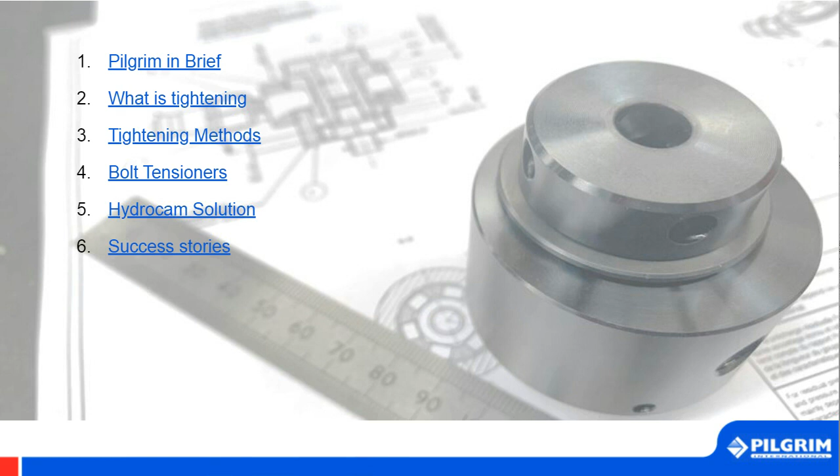First, we would like you to view a short video on who we are.

Pilgrim has been at the forefront of critical bolting technology for over 60 years in every industry where this is a requirement, putting us at the forefront in the world of trouble-free connections. And through our inventive ideas and solutions, we still remain the company of choice for bolting and tensioning systems, where we remove the uncertainty from critical joint fastening.

Over these years, we've come up with thousands of solutions for many bolting applications, and we've categorized most of our product ranges into 5 simple, easy to visualize categories. Today, we shall concentrate on our hydraulic tensioning systems range, branded HYDROCAM. I shall now hand you over to my colleague Ivan, who will take you through the next few slides.

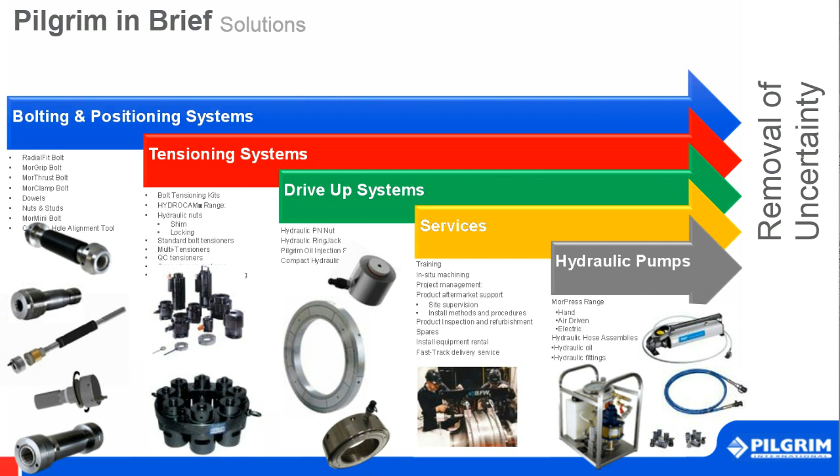Thank you so much, Martin, and hello everybody. So, exactly what is tightening?

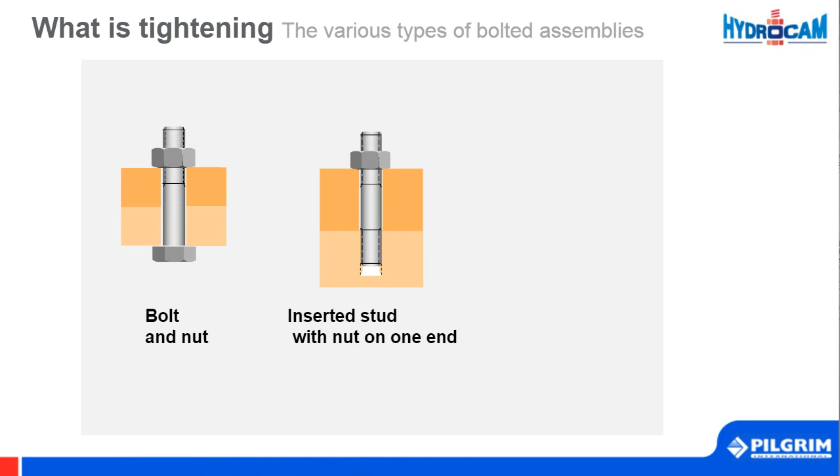Here are just 3 examples of the most common bolting arrangements used for bolted connections. There's a bolt and a nut, quite simple. A stud inserted into a blind threaded hole, plus a nut. And thirdly, a stud with nuts on both ends.

We should also be aware that the forces on the joint can act in many ways. These include traction compression, traction and bending, sealed containment systems, shear forces, dynamic loading, and spontaneous loosening. All of these must be taken into consideration at the design stage to ensure the most effective method of tightening the bolts.

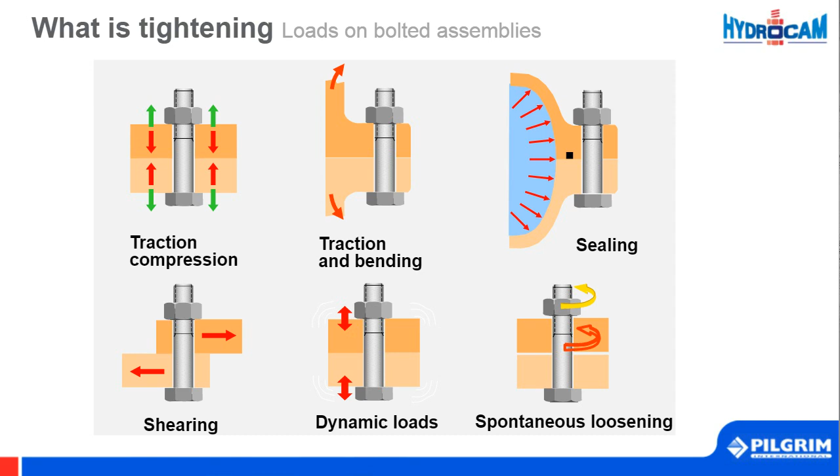Each bolt itself acts like a spring. Once stretched, it will always want to return to its original length. So, once we know what the load is required to secure the entire joint, we can introduce an applied load to each individual bolt. Tightening each nut under this load will result in an accurate total loading of the joint. But please note, the aim is to apply the same load to all of the bolts.

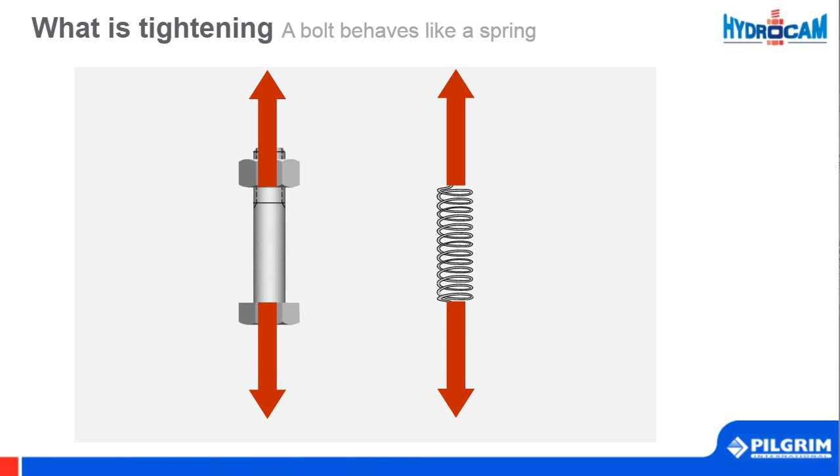Within the elastic range of the material, the more force you apply to the bolt, the more strain or elongation you obtain. As with a spring, when loading the bolt within its elastic properties, the bolt tries to come back to its original length, which translates to a clamping load.

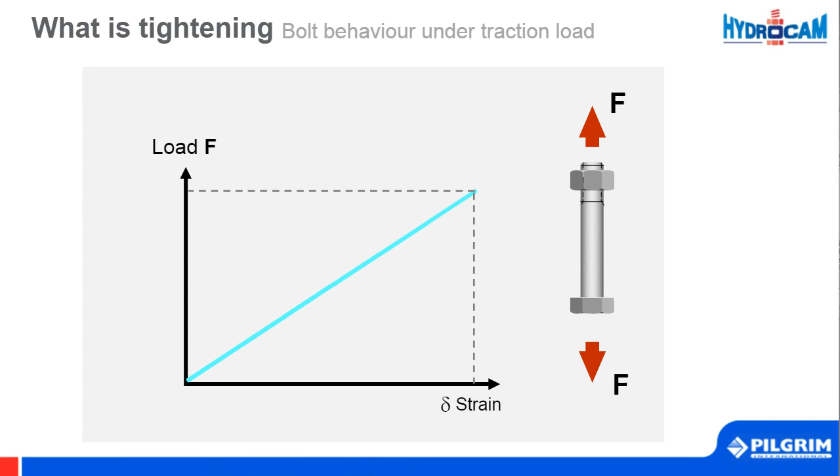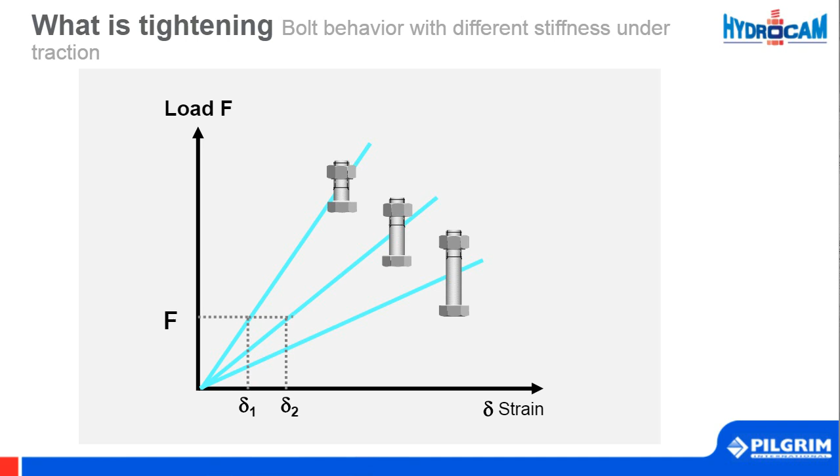The natural behavior of a typical bolt material is that the longer the bolt, the more spring it is capable of. And conversely, a more compact bolt will be stiffer.

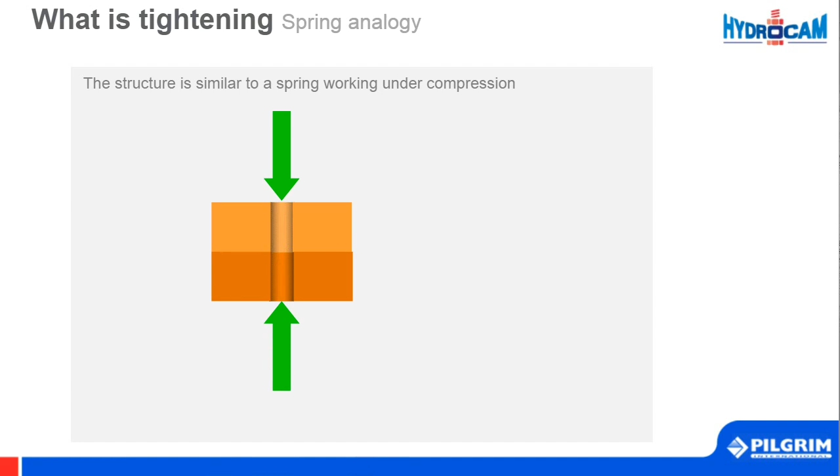As with the bolt, the structure itself also acts as a spring. When a compressive load is applied, the structure is going to compress. In addition, the thicker the material is, the more it compresses.

Bolts are typically made from steel. Like most metals, steel is elastic, so long as the strain or elongation does not exceed the elastic limit or yield point, beyond which permanent deformation occurs.

Within the elastic limit, a metallic component such as a bolt follows Hooke's law. That is to say that the strain or elongation is proportional to the stress or load. Any tightening method must ensure that the stress in the bolt never exceeds the yield point, above which deformation is irreversible.

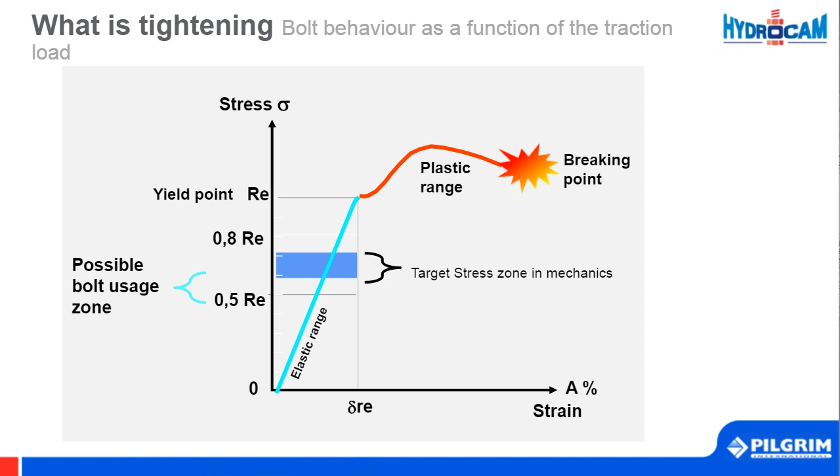Although bolt tightening can be effective from 50% of the yield point, the operator will typically target 70 to 80% of the yield point, because this is the optimal stress zone for tightening.

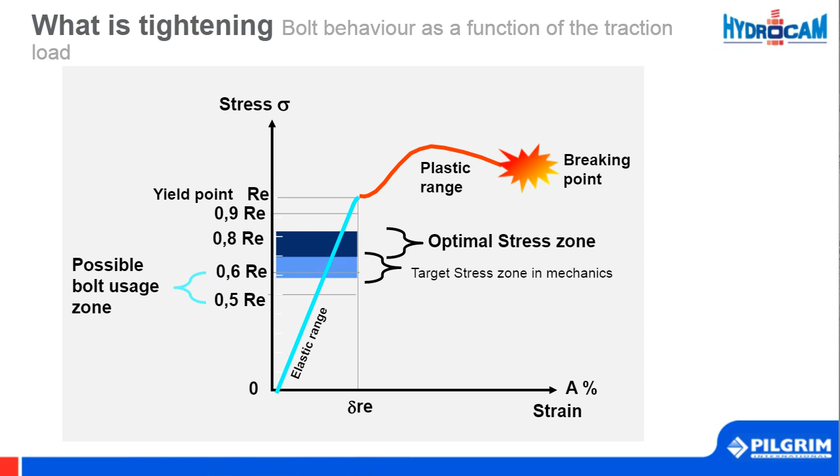An external load could also increase the traction force beyond the yield point of the material, at which stage deformation will be irreversible.

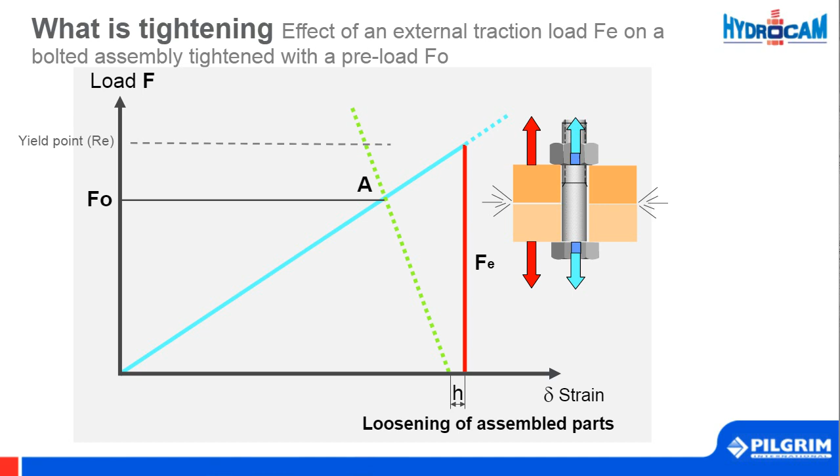We'll now talk a little bit about alternative ways to tighten a bolted connection. And here is a short video to show just one method.

Well, that's certainly one way to tighten a bolt. It is tight, isn't it? Well, maybe, maybe not. And in the world of critical bolted joints, we simply don't work in the world of maybes.

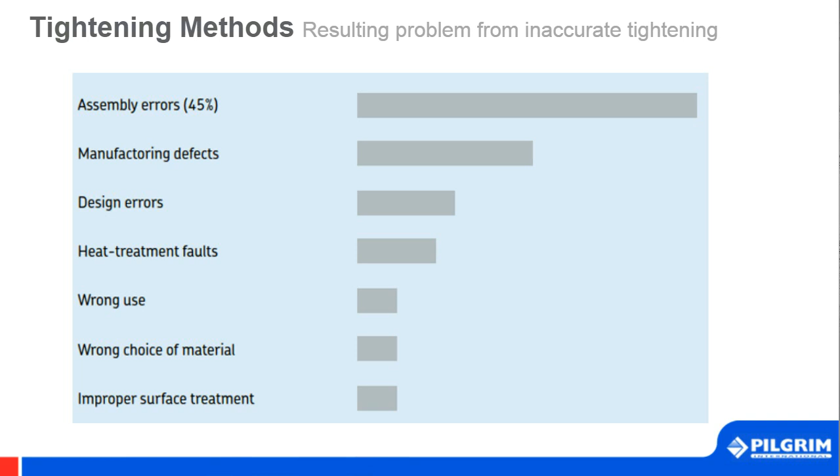Here are some alternative ways of bolt tightening: hand torque wrenches, hydraulic torque wrenches, heat induction, and tensioning.

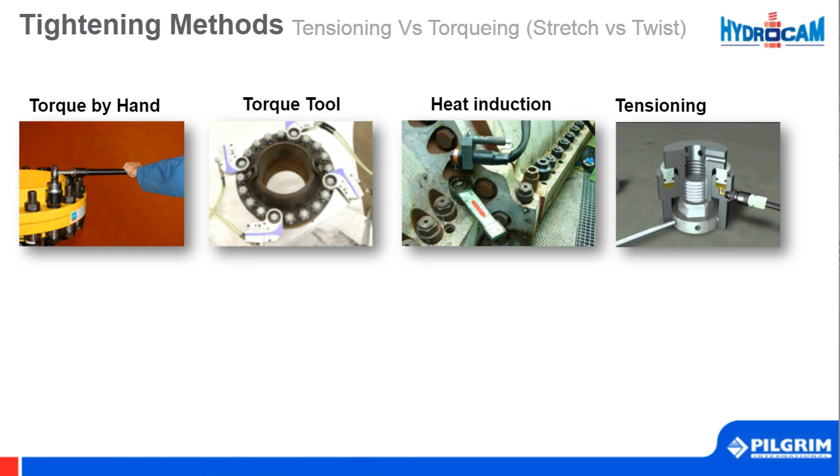Considering torque tightening, the most accurate method would be where there is absolutely no friction in the system to overcome, so that most of the torque is converted to tension load.

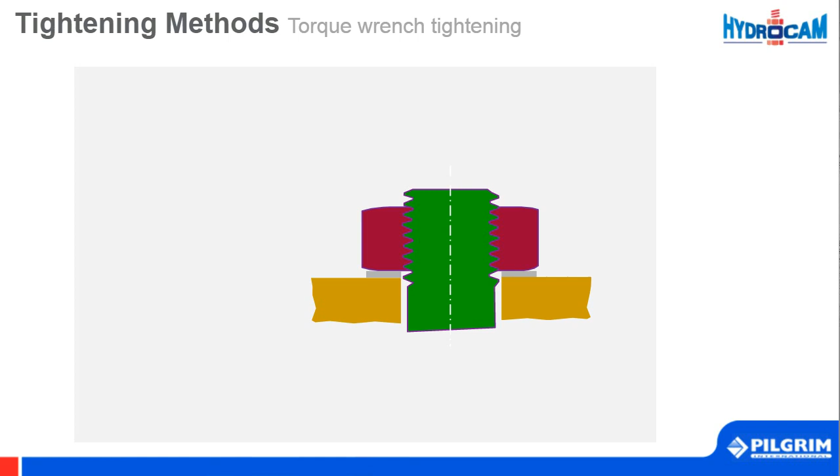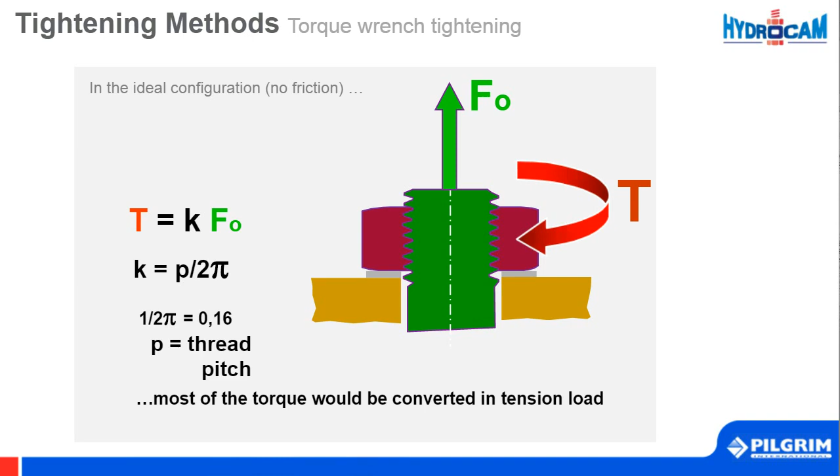But here's the reality. With torque tightening, there is always friction to overcome, both between the threads and the load-bearing surface and the face of the nut. In addition, a torque wrench will introduce torsion or twist in the bolt, which adds even further unknowns.

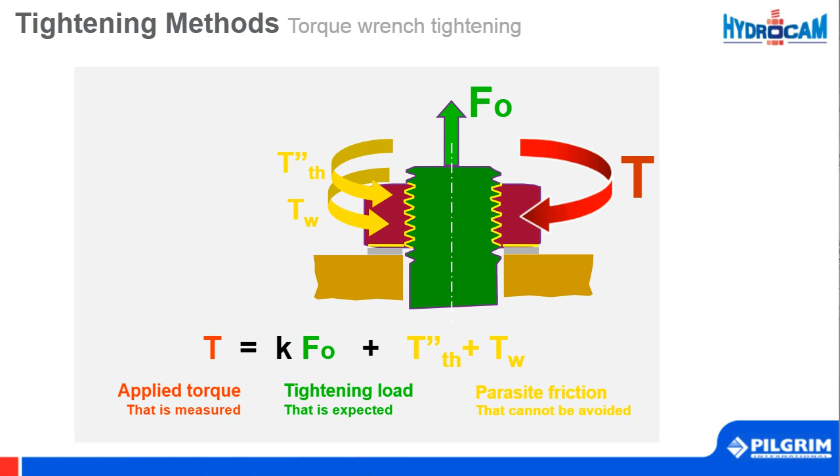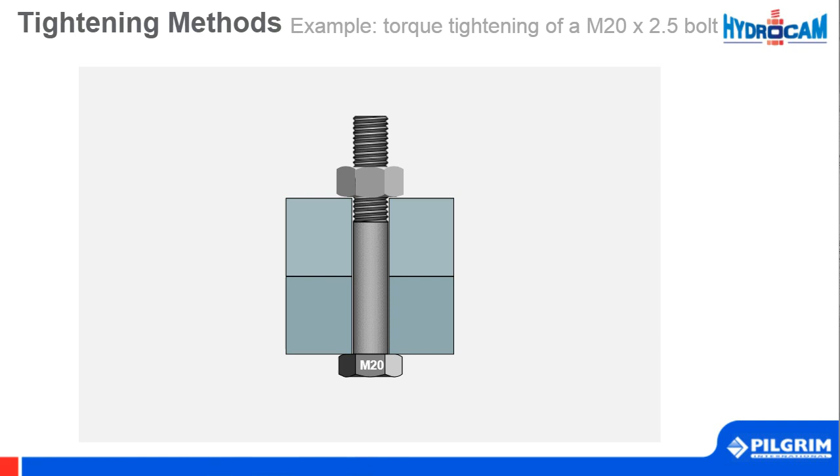Just so that we can understand the magnitude of these friction losses, here's an example where 520 Newton meters of torque is applied to a bolt. 180 Newton meters is used to overcome friction in those threads. A whole 273 is used overcoming friction between the nut face and the assembly. So only 67 Newton meters is eventually translated into an applied load in the bolt itself.

So friction soaks up generally between 80 and 90% of the applied energy, leaving just 10 to 20% of the wrench's power to apply a load to the bolt. That is a lot of wasted effort.

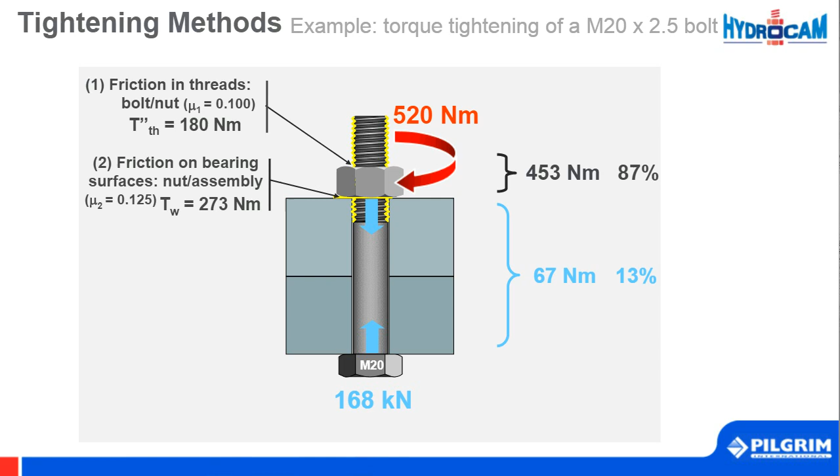That is just one of the reasons why there can be a high degree of uncertainty of the final bolt load when using a torque wrench, as your tightening method, along with the thread and bearing surface condition, the type of lubricant used, if used at all, along with the calibrated accuracy of the wrench, which is generally plus minus 4% of the maximum output value, these introduce unknowns.

Also, the effects of parasitic torsion cannot be dismissed, as the torsion within the bolt reduces tightness over time because it's trying to loosen the bolt during normal service. This problem can be further exacerbated if also subjected to vibrational forces.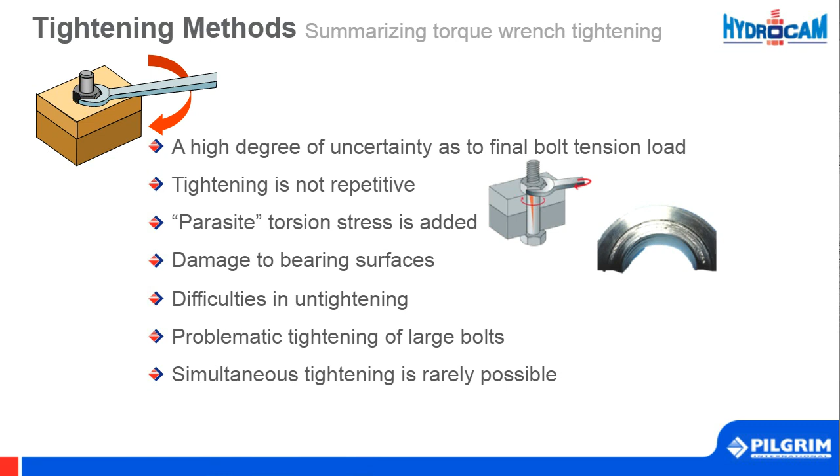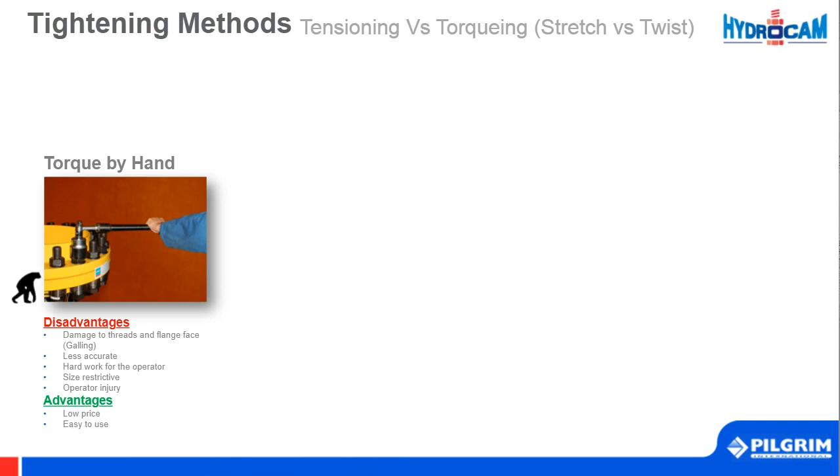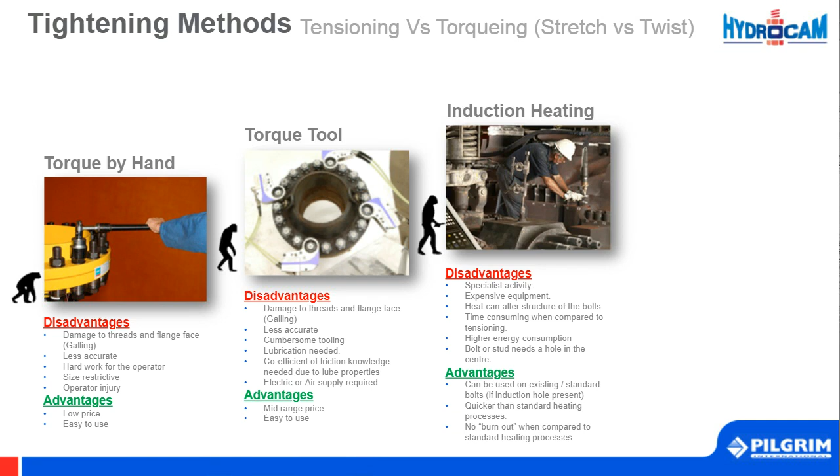But of course, there are advantages and disadvantages to all tightening methods. And what we want is the most effective and accurate method for your application, and a method that can cover all your applications with the greatest accuracy, the least chance of operator error, and the highest amount of safety when applying this method.

Which leads me on to the next method of bolt tightening, through the use of hydraulic tensioners.

A standard hydraulic tensioner is made up of several parts to give a complete full assembly. There's the brace, the hydraulic body, and the skirt. Then accessories such as sockets and Tommy bars are used to aid bolt assembly.

In the following video, we will show you how these parts come together to easily apply a load to your bolt.

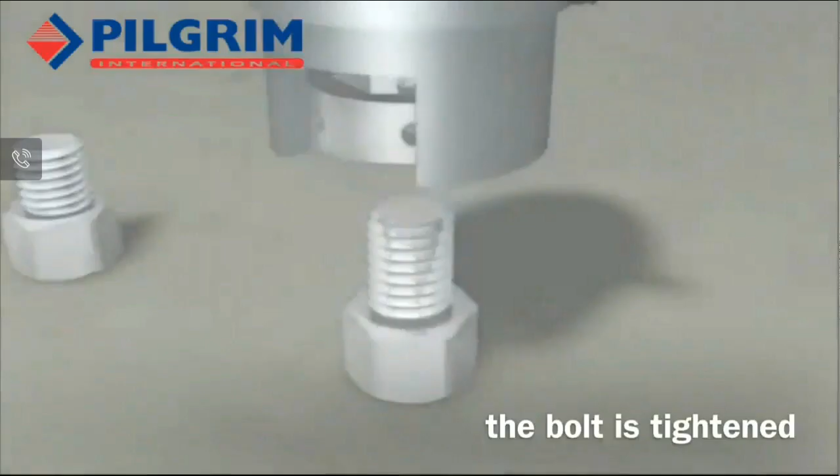Now let's see how the tensioner applies a high pressure to the bolt. Firstly, we know that the yield point should not be exceeded. Secondly, the residual load should be within 80% of its yield point. This is calculated at the design stage to ensure a controlled and accurate load is applied to all of the bolts within their elastic limits.

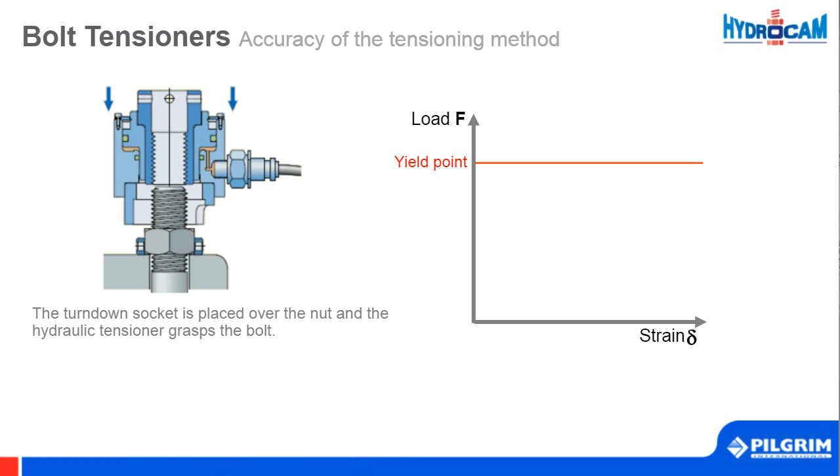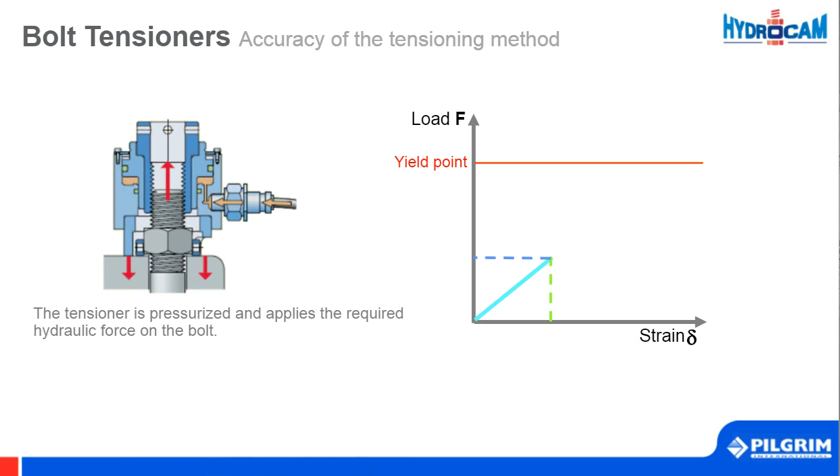The socket is placed over the nut, and the brace or puller is then screwed onto the bolt. The tensioner is pressurized, which stretches the bolt to a known hydraulic load. The operator screws down the nut, and the pressure is released, leaving a known residual load within the bolt, which is a function of the clamp length to diameter ratio.

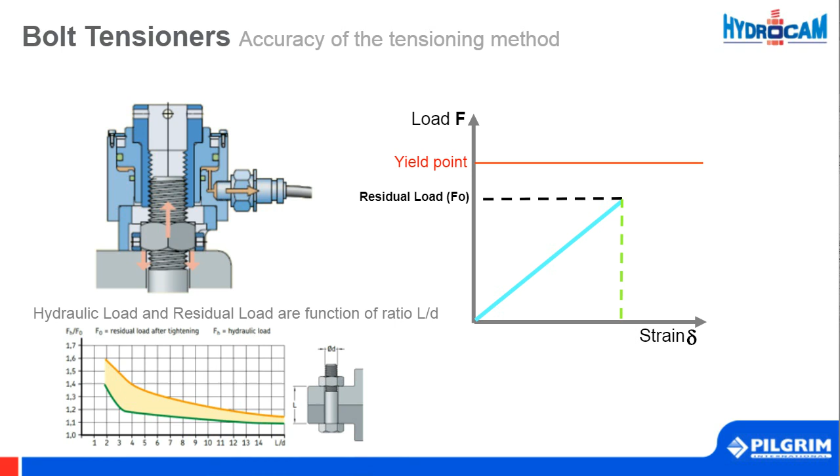The tensioner and the socket can now be removed. The end result is accurate tightening, which will be repeatable every time, and the elimination of uncertainty.

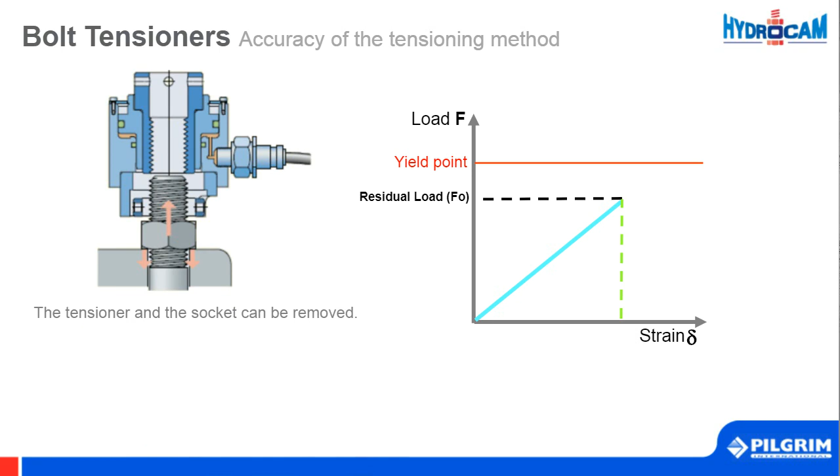For even greater accuracy, we would highly recommend the bolts be tightened homogeneously. This means tightening several bolts simultaneously. Homogeneous tightening is particularly important when it is critical to ensure an even load across the whole application, to avoid any distortion by tightening a single bolt at a time.

I think we've all seen this effect when changing a car wheel. Tightening one bolt can affect the tightness of all the other bolts around it. As each set of bolts are tightened, the surrounding bolts may lose load. To eliminate this, we recommend that two or more passes are made around the bolts.

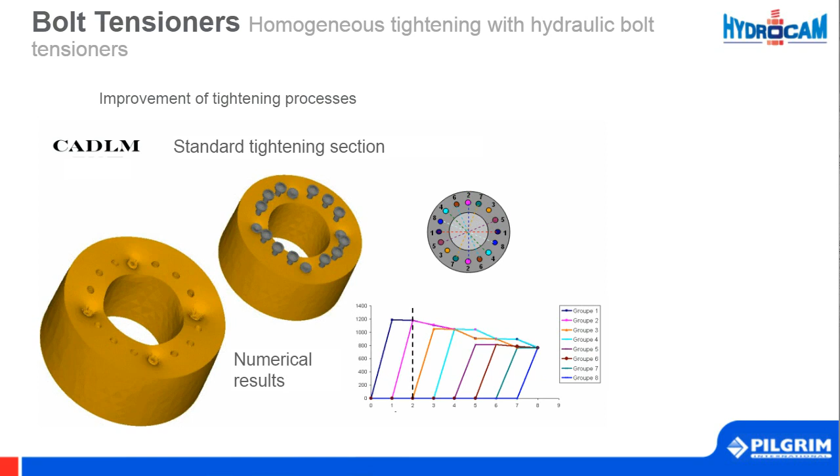This is further illustrated in this slide. This is tightening up bolt number one. We then start to tighten bolt number two. And you can see that the load in bolt number one starts to reduce.

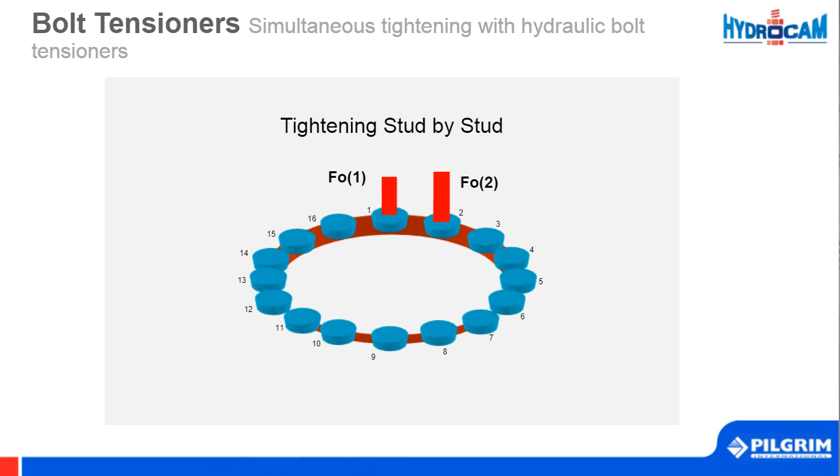The advantages of hydraulic tensioning are absolutely vast. There's a more accurate, repeatable, and controlled loading. It's simple, quick to use, with no damage to any surfaces or components. Simultaneous tightening of several bolts can be used to save time, and we can also incorporate a fully automated system if required.

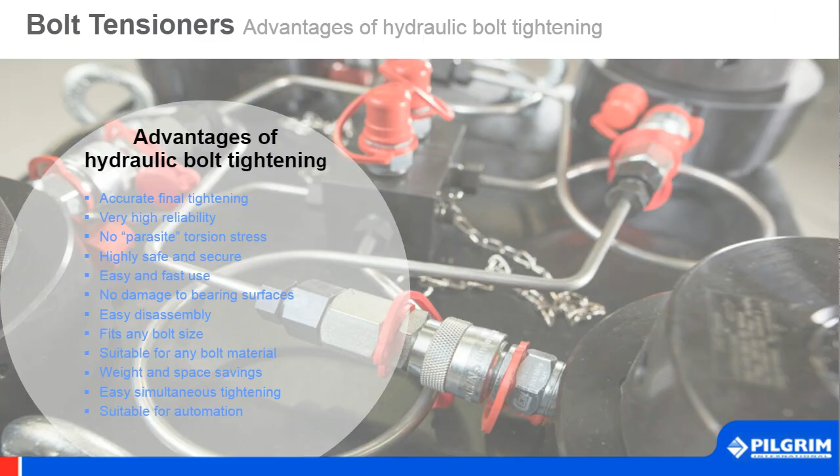Thank you, Ivan. I will now take you through the last few slides, concentrating mainly on our HYDROCAM range of tensioners and where they've been used in some applications.

Our HYDROCAM range can be split into three simple categories, starting with our standard range of tensioners, covering most standard thread sizes and coming both single and double stacked to give a greater load in a smaller area.

In the second section, as Pilgrim both design and manufacture these units in-house, they can be easily adapted to suit your application by redesigning the skirt and the brace where space may be tight.

And in the third section, our bespoke custom design units with multiple tensioners incorporated into a section ring for a quicker and easier installation to the application, giving 100% coverage.

They also come with options like automatic nut turn down, automatic piston return systems, and overstroke limiters to stop you overstroking the piston.

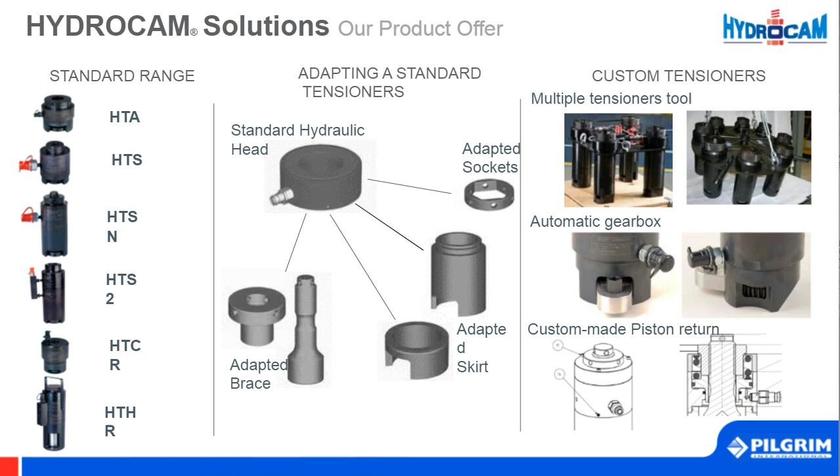As most of our tensioners use a brace to attach to the bolts, you can even have multiple brace thread sizes that utilize the same cylinder and skirt. These thread sizes come in both metric and imperial, ranging from as small as M8 all the way up to M160 and even greater upon application.

A huge range of thread sizes. It saves cost and stock levels.

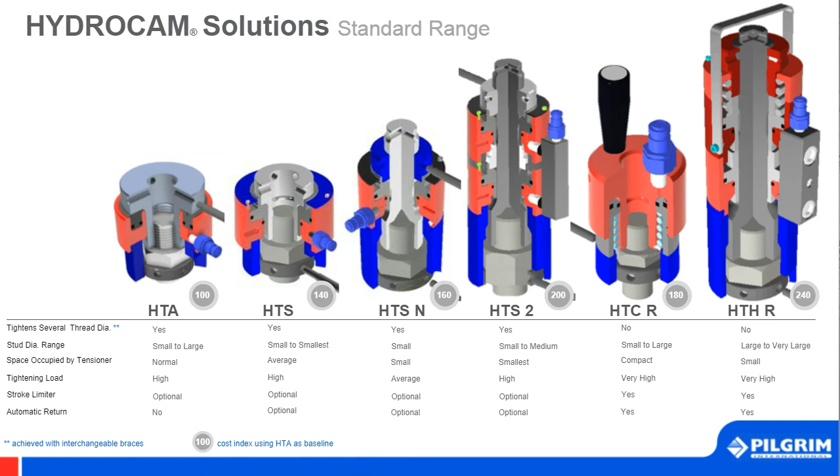And as you'll see in this graphic, the HTS2 and the HTHR are double stacked units. These allow for a greater load over a smaller area and are incredibly popular in the wind farm industry, where space is generally very tight.

We can adapt or design any tensioner to suit your needs. Micro tensioners that start as low as M5. Multi-tensioner rings incorporating many tensioners into a single unit. Units made from different materials for maybe weight reductions, where maneuverability is not so easy, or you have a harsh environment.

We can also use water as the medium to create the load in the cylinder. For applications where leakage of oil could impact the environment, this is again very popular in subsea applications. It's a not so common medium, and it's also quite unique to HYDROCAM.

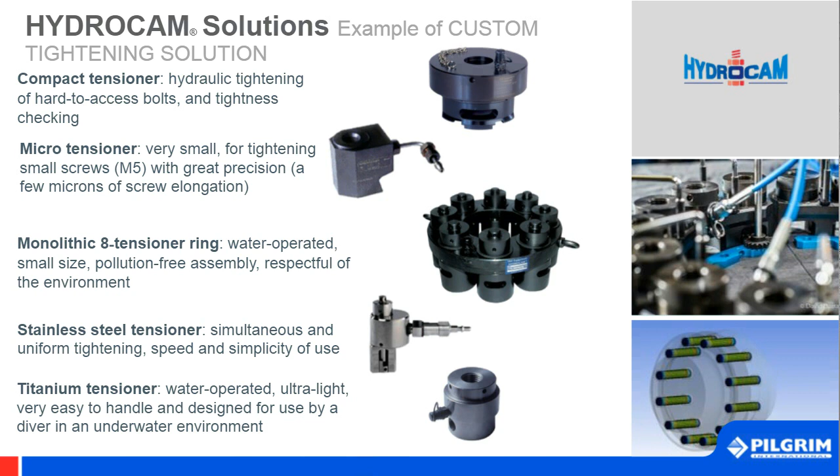And of course, we're constantly updating our designs and incorporating new aspects to further reduce time and energy required to complete your bolting requirements. As you'll see in the video playing in the top right, our quick connect tensioner saves even more time by allowing the operator to simply drop the whole unit onto the bolt.

It secures itself to the bolt with no screwing down of the brace required. Again, very popular in the subsea range, saving time and energy from the diver, giving a very quick return on investment. And in the section below, the aforementioned multi-tensioner rings allow the installation of multiple tensioners, creating a perfectly homogeneous fastening of multiple bolts simultaneously.

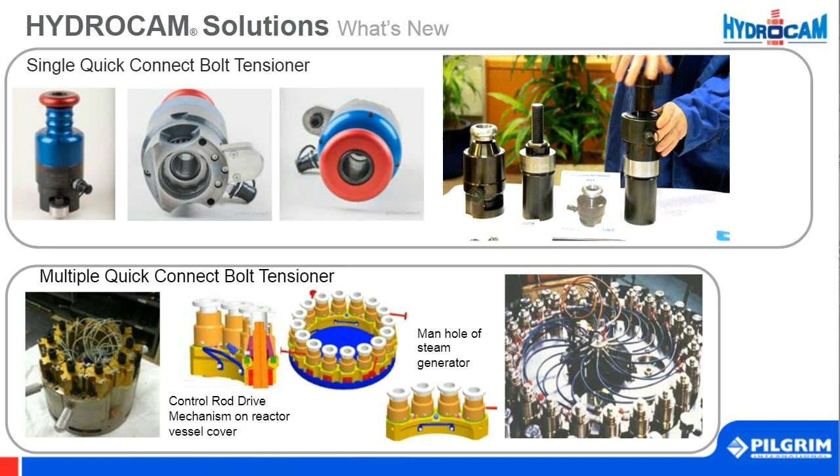And of course, we provide all the peripherals that you may require. Our range of pumps come in hand-operated, air-operated, and electrical. We can supply all the hoses and fittings, and a range of connector blocks to couple multiple tensioners from one single pump unit.

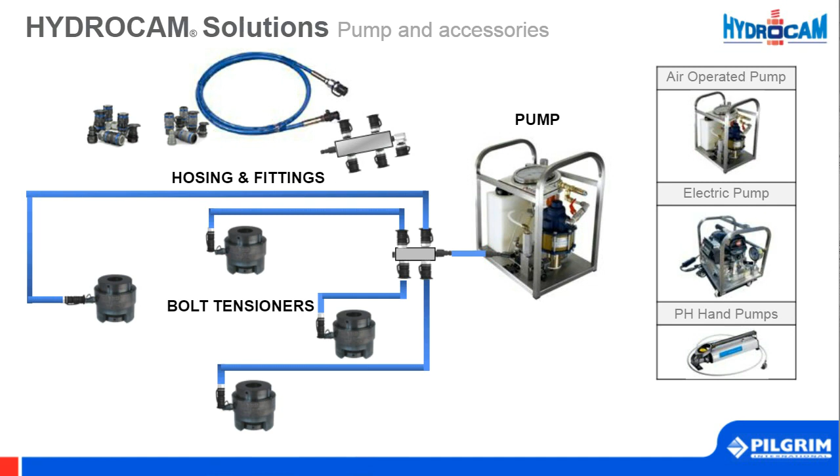So, as you can see, from our standard range through to our bespoke units, we have a solution for every application within every industry that requires controlled and accurate bolting.

In this last section, I will take you through a small selection of applications that we've provided solutions for. Hopefully, one or more of these may even be familiar to yourself.

The first application, we supplied our standard HTA tensioners. They fastened several bolts holding together a large press in a rolling mill. The result was a huge reduction of downtime when maintaining the presses, but they also had zero damage to the bolts or the surfaces.

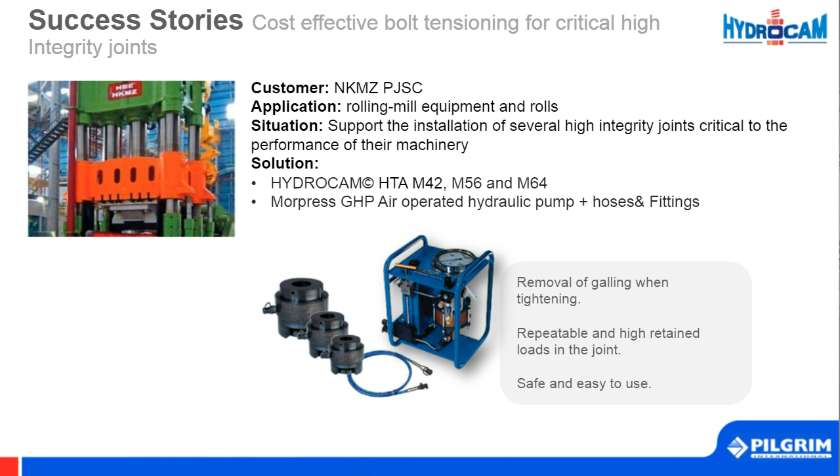This particular application was on the Öresund Bridge, which connects Sweden to Denmark. It's the largest road and rail bridge in Europe. What they required was a tensioning of 20 studs simultaneously on the cable anchor system.

Not only did they need them to be tensioned together, they also needed it to be perfectly in alignment. So by using our spherical seating system, we were able to ensure that all the units self-aligned as the load was being introduced, keeping everything perfectly straight. This greatly reduced downtime and kept the bridge open when it was needed.

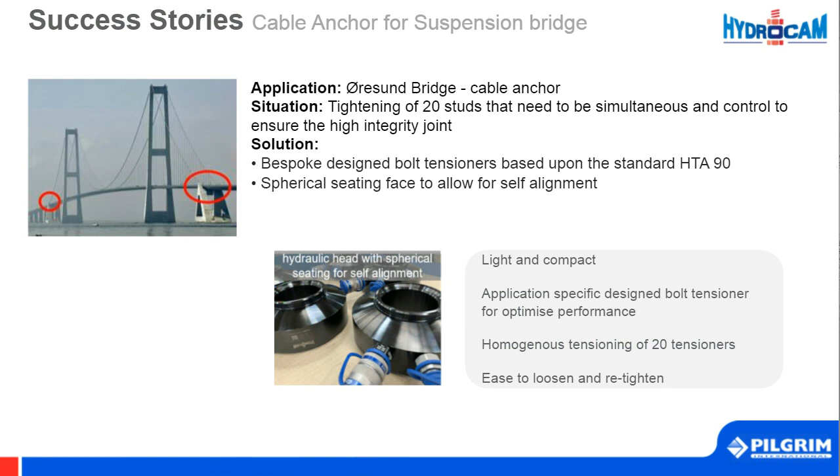This particular application is a ropeway transport system, and it actually required an adaptation of our standard HTCR range. The bolts were to secure the foundations, and as you can see from the picture, they were very tight.

So we adapted the skirt and the body to fit into the geometry of the foundation. Again, we used a spherical seating to ensure that no bending was incorporated while inducing the load, as the base wasn't perfectly flat. This reduced downtime, but the operators also found this a much simpler process.

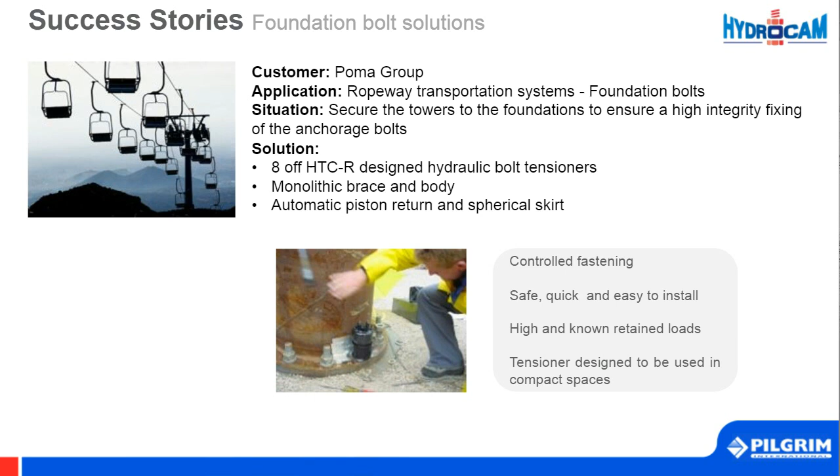This application is probably our most common and also our most successful: securing a slewing bearing. This bearing was on a catenary anchor leg mooring system, where the bearing itself was within a turntable. It's a very critical application, as this is where offshore vessels are moored whilst in operation.

By using 4 of our HTCR units, they were able to quickly replace the bearing and return to operation in record time. By tightening 4 tensioners simultaneously at 90-degree intervals, it ensured there was no distortion of the bearing whilst loading the bolts. This helped ensure its performance in operation and obtain its maximum working life.

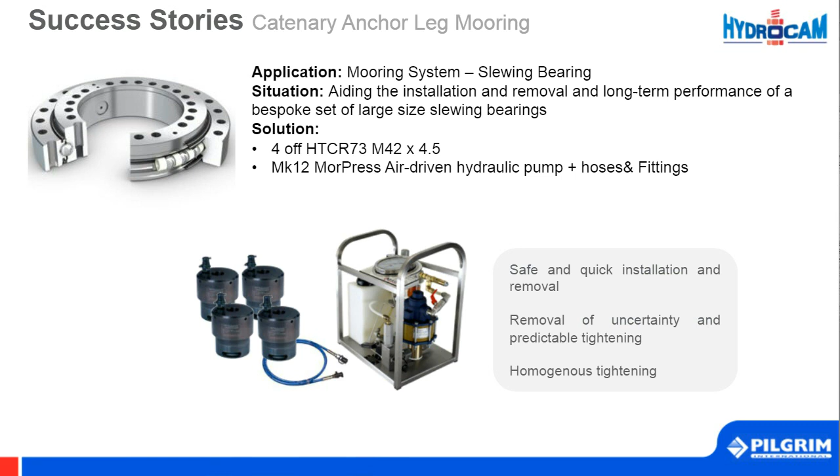This is particularly good because we were very privileged to be chosen to be involved in the construction of the Deep Blue. The Deep Blue is the largest purpose-built pipeline and subsea construction vessel in the world. Most of its structures were supersized.

For this application, they required the tensioning of 6 large bolts to hold down their bearing housing, which incidentally held 2 of the largest bearings ever made. 3 bolts were at M64 and 3 bolts at M80. There was a large amount of force required to secure the housing of these bolts.

So after a design review, our standard HTA tensioners were selected. We actually already had a perfect solution, designed and ready to go for a quick turnaround. This allowed the customer to continue with the construction, with no delays to their delivery schedule.